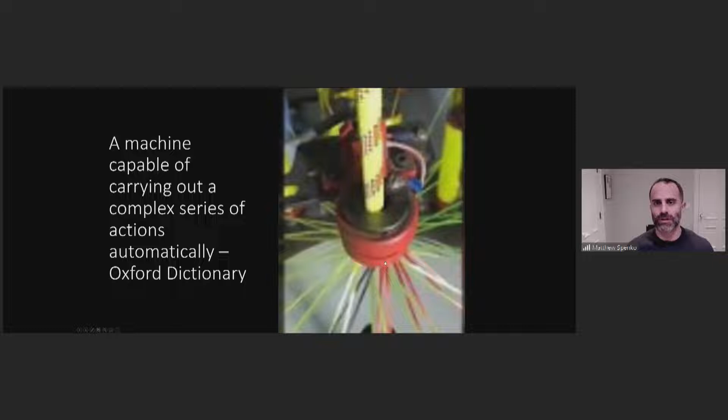So the first question I'm going to ask here is, what is a robot? I'm sure a lot of you know what a robot is. I would guess that most people can't actually articulate it. It's hard when you ask somebody to define a word, that's really hard to do. There may be some people out there who don't know what a robot is, or have a feeling for what it is but aren't really sure. So I'm going to look at a couple different definitions of robots.

The first one I found online, from the Oxford Dictionary, is: a machine capable of carrying out a complex series of actions automatically.

So I'm going to play a little video right here and we'll see what we can do. I would argue that this is a machine carrying out a complex series of actions. We've got all this, it's creating a rope, right? It's binding all this rope together, and we can watch that again.

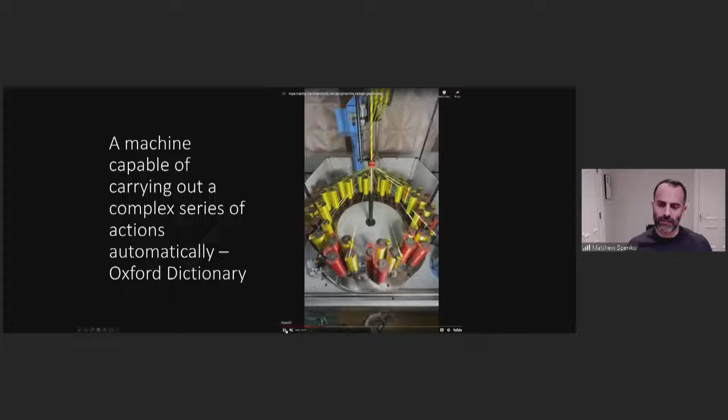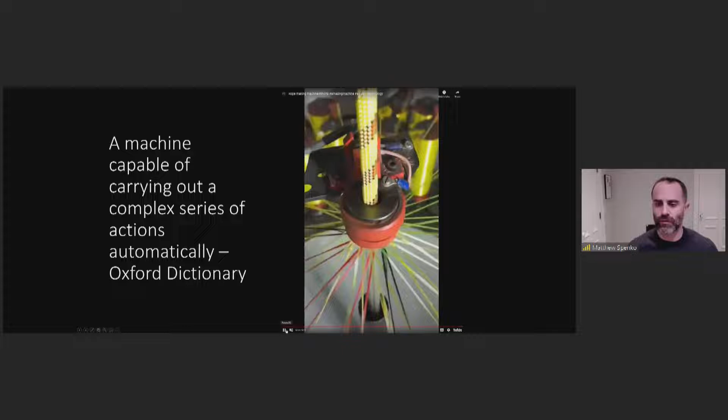Sometimes when I ask people and get some feedback, how many people think this is a robot? A lot of people raise their hands, they think this is a robot. I'm going to disagree, I don't think this is actually a robot. I think this is doing something over and over again. It's automatic, it is doing a complex series of tasks, but there's something about that just says, hey, that's not really a robot to me.

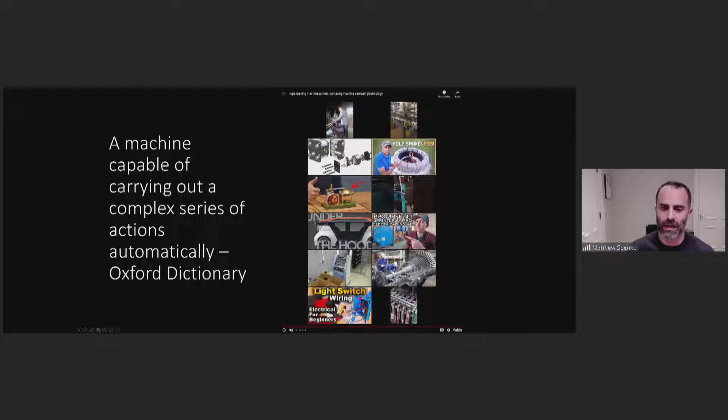This is another example right here. This is a definition, again, from the internet: a machine that operates automatically with human-like skill. So I always start off with what human-like skill is.

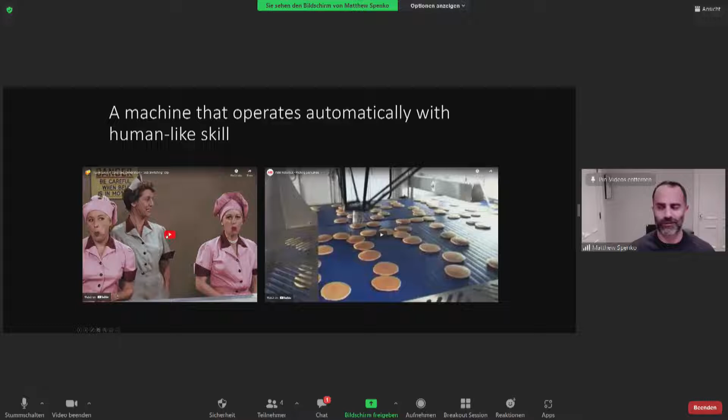This first clip here is from I Love Lucy, a famous TV show from the 1950s in America. This is one of the famous scenes where Lucy and her friend Ethel are working in a chocolate factory. We won't watch the whole thing, it's actually very, very funny, but we'll just watch a little part of it right now.

Looks like my sound isn't coming through, but that's okay. Basically, the instructor's telling her, hey, it's time, we're gonna work on this chocolate factory. So Lucy and Ethel are moving along, and they're wrapping up the chocolates in the chocolate factory. As you can imagine, in any sitcom, it's not going to go quite well for them. Things are going to speed up. I'm gonna speed it up a little bit here.

I'll skip ahead as they're moving along here. And of course, all of a sudden, they can't actually keep up, right? This is a very common robotic operation, this is a pick and place operation. There's a lot of robots out there who do these types of operations.

All right, so obviously, they're not going to make it, and they end up going too far, right? Okay.

Now I'm going to show you another video here from a modern robot. This is called a parallel link manipulator, and these are designed for pick and place operations. We'll show it here.

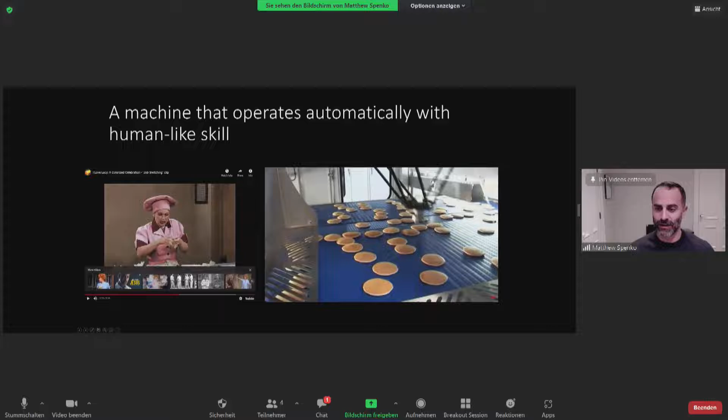So this is a robot doing the same thing. It's picking up pancakes in this case. Nothing like delicious industrial made pancakes. You might feel different next time you go to the store and buy some pancakes, knowing that this is how it's done. But look at how fast this thing is moving.

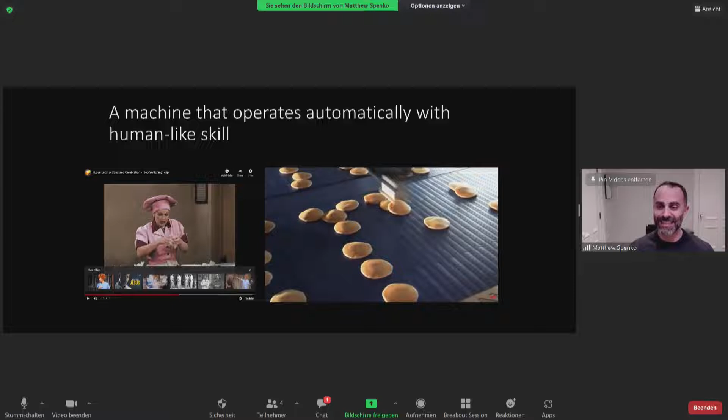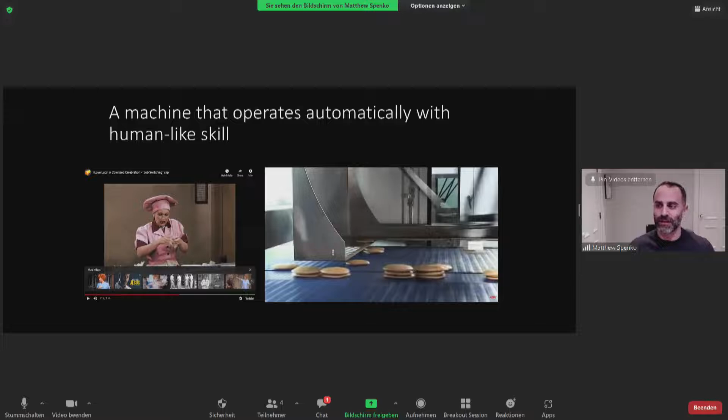And this isn't even top speed for these types of machines. These machines can actually move much, much faster. It doesn't need to, obviously, in this case. But I'm arguing here that this is a machine that's operating with something that far surpasses human-like skill. It's much, much better than human-like skill. So I don't like this definition either, all right?

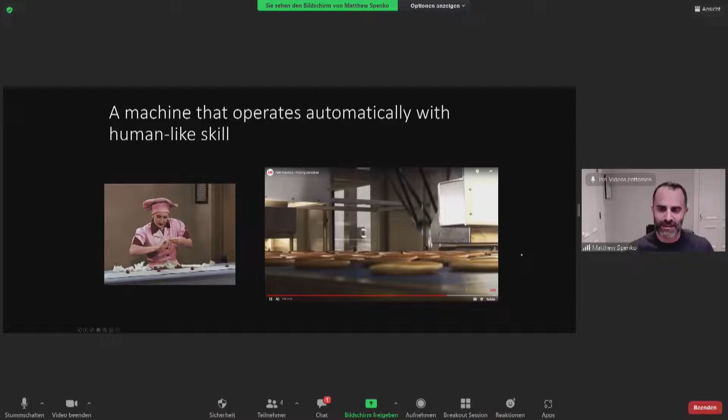All right, so next definition we have, here we go. This is from dictionary.com, and this is a machine that resembles a human and does mechanical routine tasks on command. So I'm going to show you this video from Boston Dynamics. Probably I'm going to guess there's a large number of you who have seen some videos from Boston Dynamics. Boston Dynamics is a company that is definitely at the forefront of mobile robots, and they have been for many, many years, for decades.

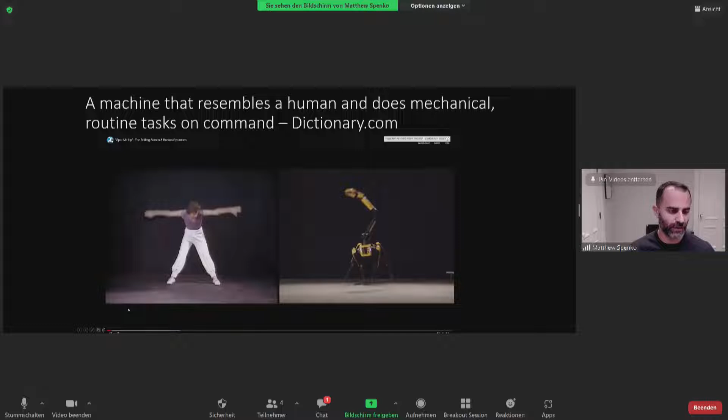And they specialize in legged robots, so they're a lot of fun to watch. Again here, the sound doesn't seem to be coming through, but we'll see. If it does, you can see Mick Jagger on the left and the Rolling Stones. And you've got one of their quadruped, that's a four-legged robot on the right, that is dancing along with Mick and the rest of the Stones here.

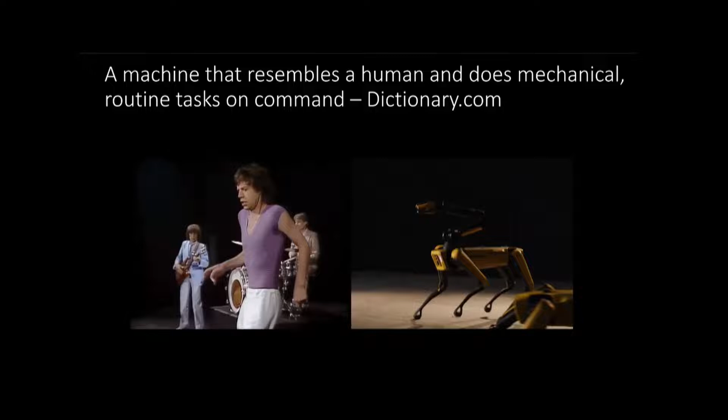I'm going to argue here that that is definitely a robot, and it's definitely not doing any sort of routine task on command. It is executing a series of complex behaviors. It's interacting with its environment, and it is responding to feedback in the environment.

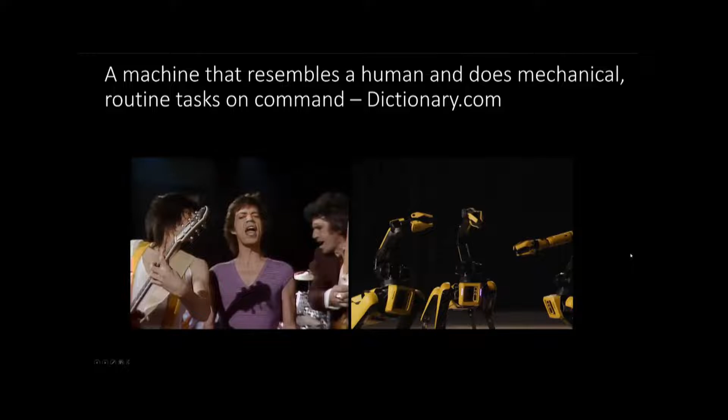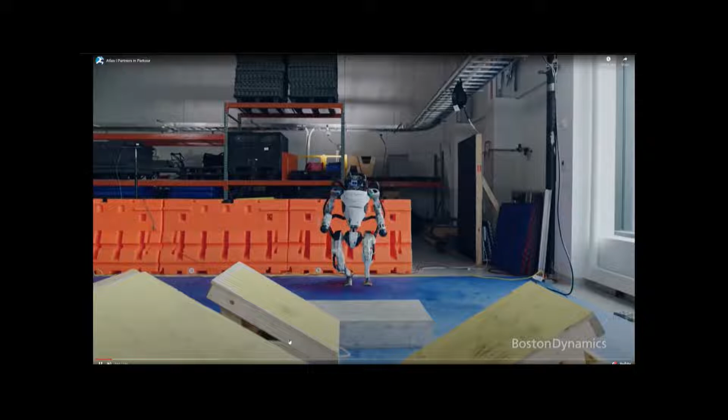So my definition of a robot is... I forgot, I got to throw this one more in because I'm going to show this a little bit later. Plus it's just really, really cool, and it's the state of the art. So we'll show this, this is Atlas robot. This is a bipedal robot, so this is one that resembles a human.

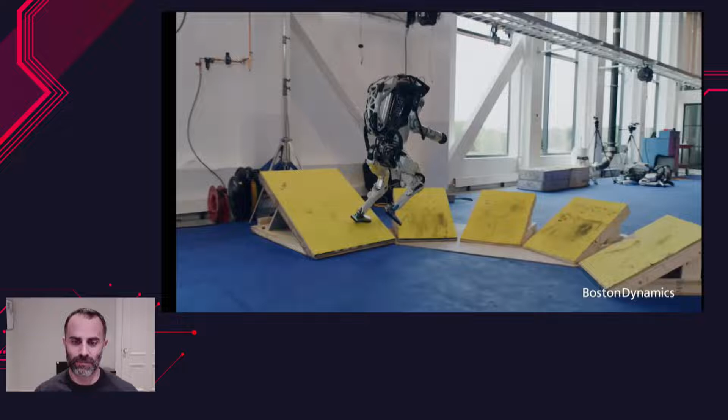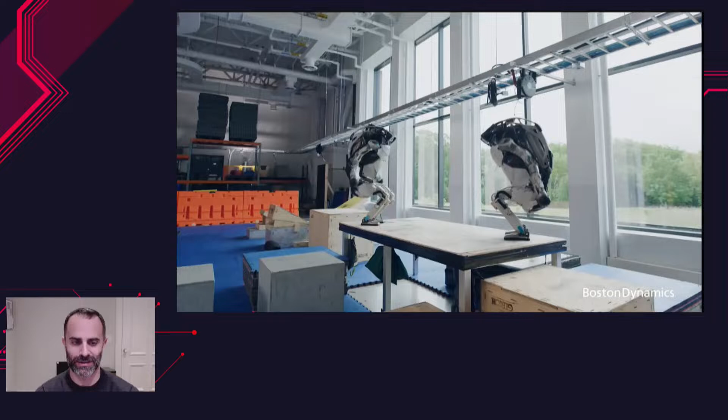You know, I've been doing this for 25 years now, and the fact that this stuff is coming out is just really, really impressive.

All right, so what is a robot? So I say a robot is a machine, because I think it does have to be a machine. It can't be a simulation or a computer program. Some people think those are robots. I don't. I think that it actually is a physical machine that moves and interacts with its environment. So it's not just like an HVAC system that runs your air conditioning and heating in a house, because that's a machine, but it doesn't move, and that's not a robot.

So it's got to move, it's got to interact with its environment such that the machine changes its behavior based upon sensory feedback. So it's got to have some idea of sensing its environment, and then changing what it does based on it.

Now those can be two different types of sensors. We have what are referred to as external sensors, probably what you think about: vision sensors, LiDARs, radars, sonars, all those types of things, and contact sensors that go out and physically interact with the environment, whether that's photons coming in or touching the environment.

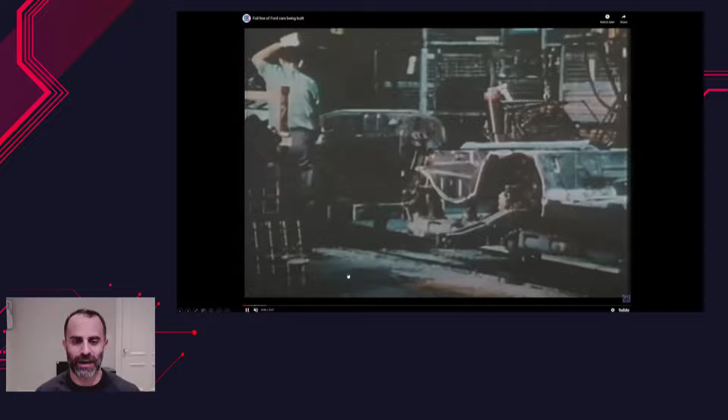Here's another video I have from the 1960s, I think. This is a factory, a Ford factory from the 1960s. I love this video, so take a look at just how many people are in this factory.

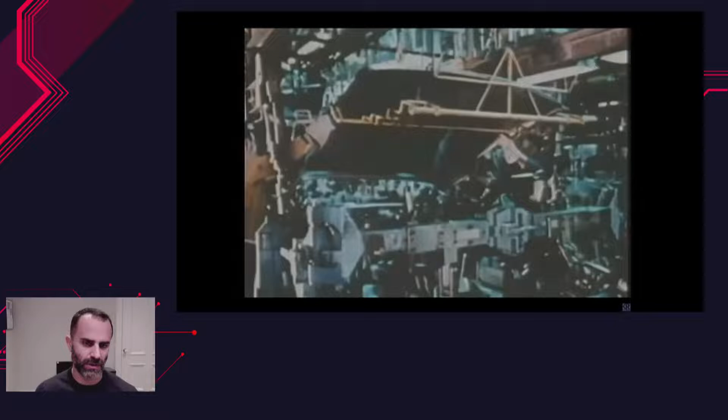We've got people moving large pieces, we've got people spot welding. These are spot welding operations, all done by humans. More spot welding, we'll see some deburring coming up soon. They're moving everything in, so much welding.

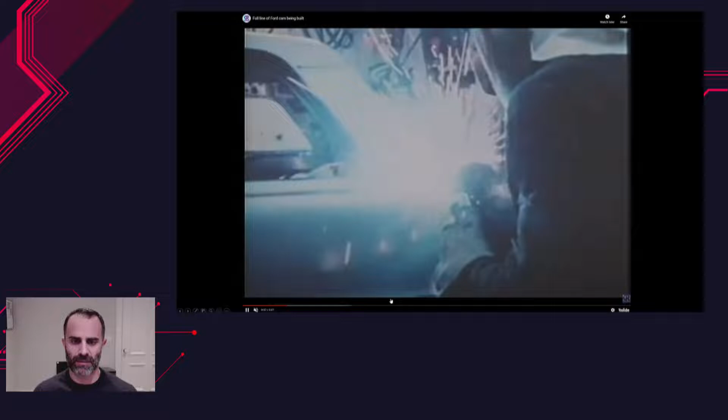Here's some soldering and brazing operations happening, more welding operations. All right, so really just a lot of stuff. Now there's another guy painting. Again, all done by humans.

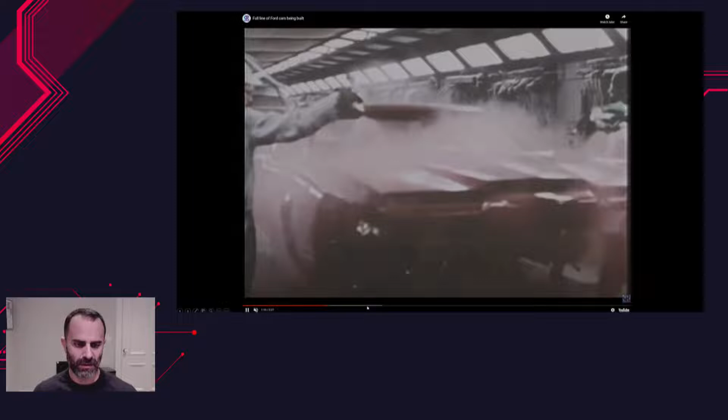One other thing, let's see if it's coming up - there's an inspector coming up and moving it on. Just to give you an idea, this was 50, maybe 60 years ago. I'm not sure if this was in the 60s or 70s, but this was pretty much the operations through the 80s. And now I want to show you what happens now.

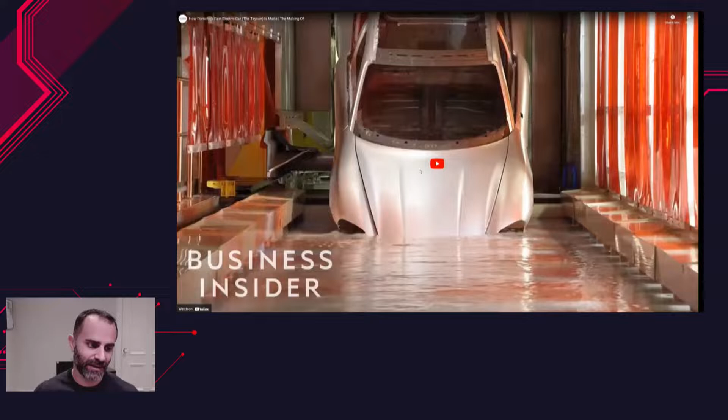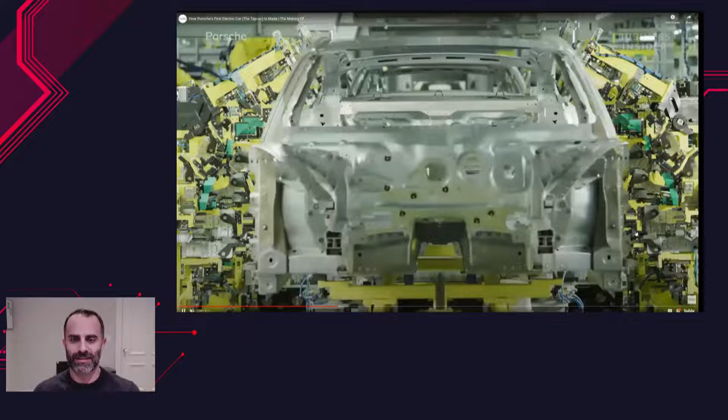This is a Porsche Taycan factory. I could have shown you the Teslas, but I like the Porsches. So we're going to watch the Porsches move through this operation. There are still humans around, but not so many.

These guys are doing a lot of finishing operations. Let me get to some of the basics. Here you have these huge manipulator arms. All the spot welding that we saw before is all done by robots now.

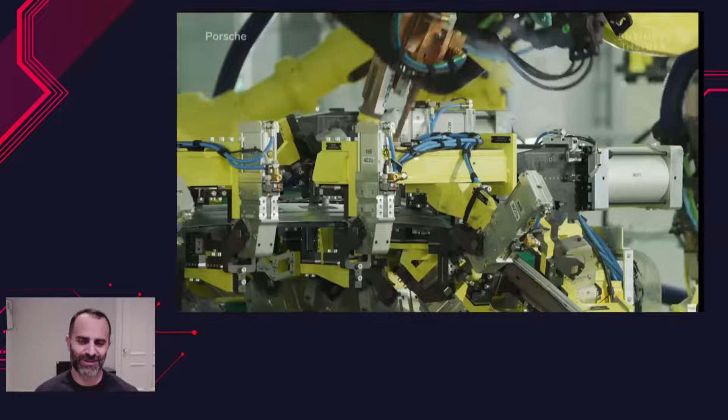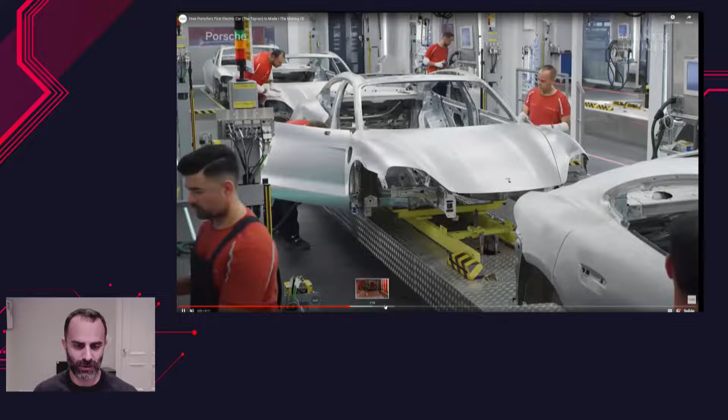There's really very little human interaction until you get to the general assembly stuff. This is starting to assemble things, doing some of the more intricate things that the robots can't do. It really speaks to just how much robots have permeated manufacturing, obviously high-end manufacturing like cars, but also other general manufacturing.

All right, so that's one example here. The other example I have is of Amazon warehouses, and these things are amazing.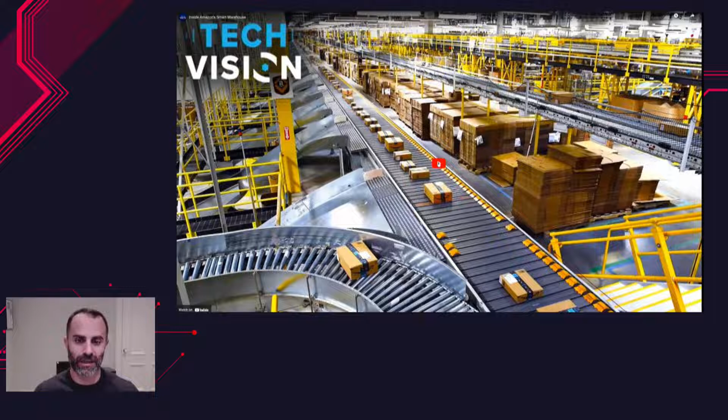I don't know if anybody has worked in a warehouse. I used to work in a warehouse when I was in high school, and it's not the best job. Maybe you work in one too, I didn't enjoy it so much. It's one of the reasons I went into engineering. But let's take a look at what Amazon does, which is very different from how I worked in a warehouse - I used to go around and take stuff off of stacks.

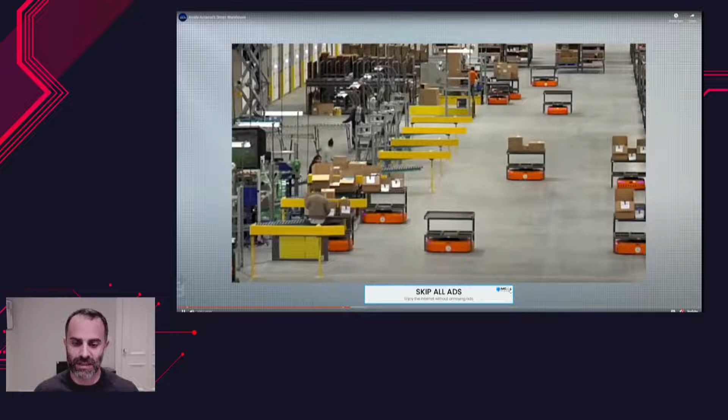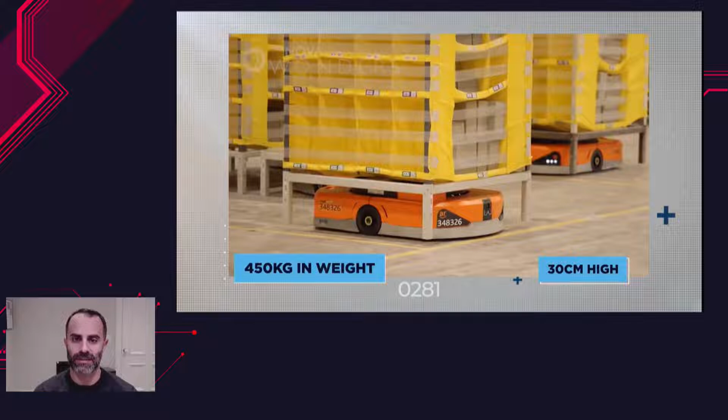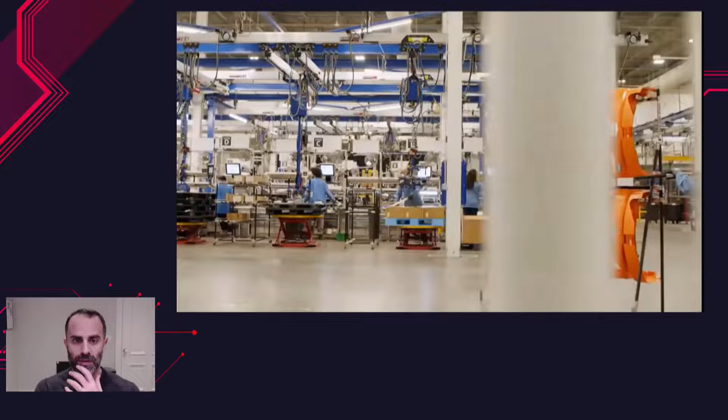So what we have here is the Kiva system. These are robots, and they're moving stacks, moving products to humans who are literally standing in place. So they're able to jam so much more into a facility. They have these giant facilities and can pack them so much more because they have these robots that are programmed, and all the humans do is put products into the stacks to go into the warehouse, or take products off the stacks.

Let's see what some of the humans are doing - we'll watch these guys doing some operations later on. So here are the humans going through the stacks. Here's an operation, here's a stack, they see them, and they're pulling these off the stacks, doing these sort of last minute operations.

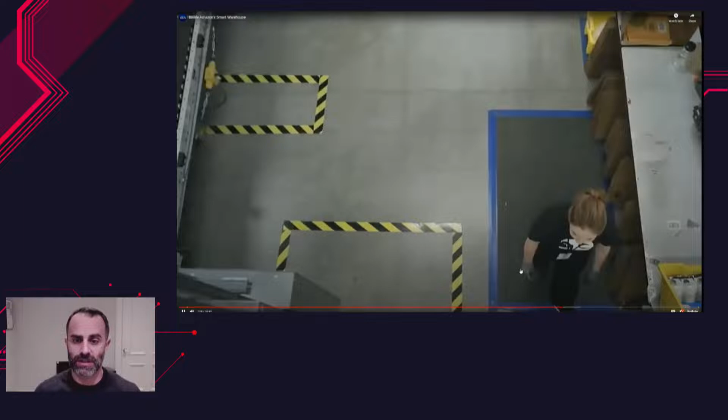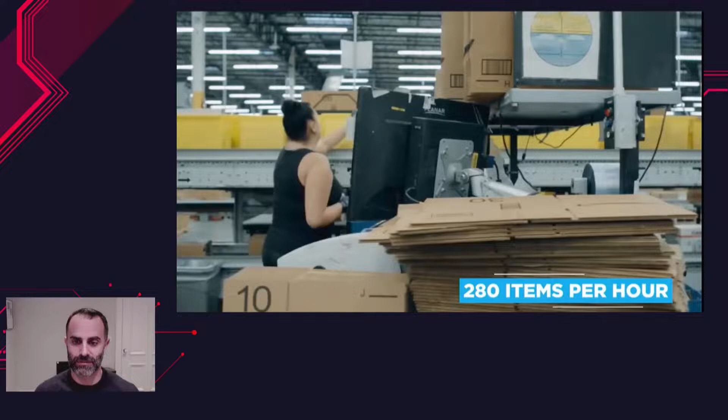Now, if you ask Amazon - and I had one chance to talk to the CTO of Amazon a long time ago - whether Amazon is trying to remove jobs, they will not say that. They will say every place Amazon goes, they increase the number of jobs, and that's probably true. Here's a good example - a person standing in one place just pulling stuff off the stack.

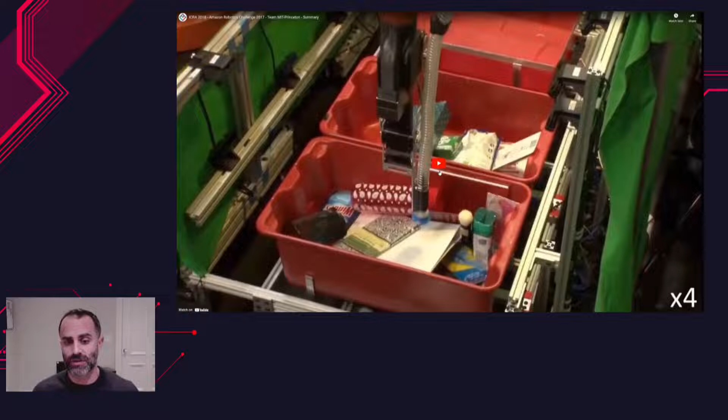Amazon also sponsors what's termed the Amazon Robotics Challenge. A lot of universities were part of this challenge for maybe 4 or 5 years or so, and their task is to create robots that pick stuff off shelves, basically doing one of the few jobs that Amazon is hiring for today.

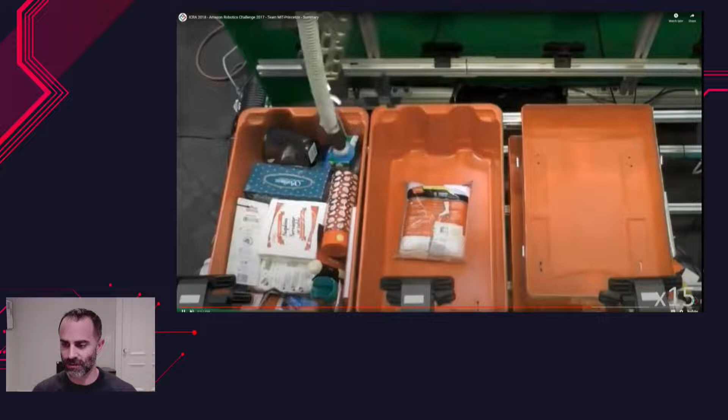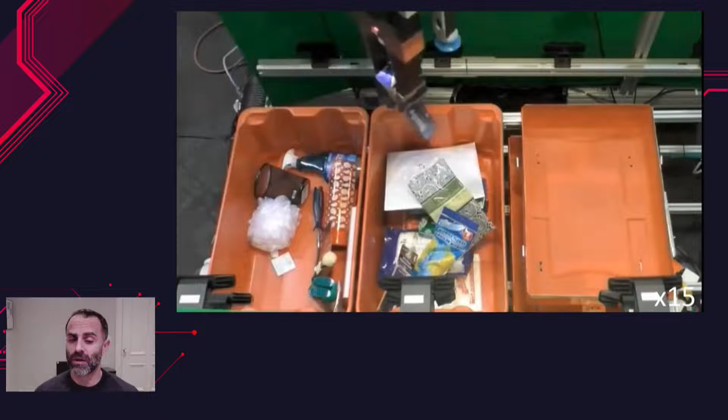Now you can see they're not that great. Every time you see a robotics video, look down and see the times 15 - this means it's operating at 15 times its actual speed. So yeah, it's doing the job, but I think the best these robots got were around 120 picks per hour, where human operations get up to 500 or 600 picks per hour. So still a far way away, but people are working on that.

These companies are putting a lot of money into these efforts.

All right, so what happens when the robots leave the factory and start coming for me? I'm sure you guys were all very concerned about this. So when the robots get their lasers and start coming after us, what do we need to do?

We have two options. The first option is that we're going to fight, and I'll show you what you need to do. The first hint is that almost all of the videos you see on the web are videos of only the robots doing the job successfully. Here's Atlas doing the same thing it was doing before, but failing every single time. I'm actually really impressed that Boston Dynamics put this video up on the web.

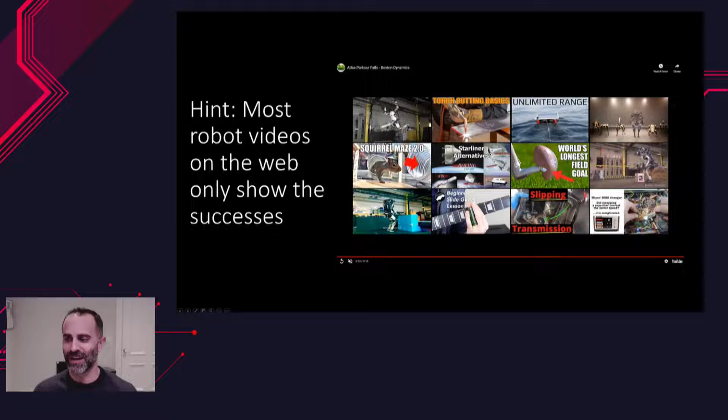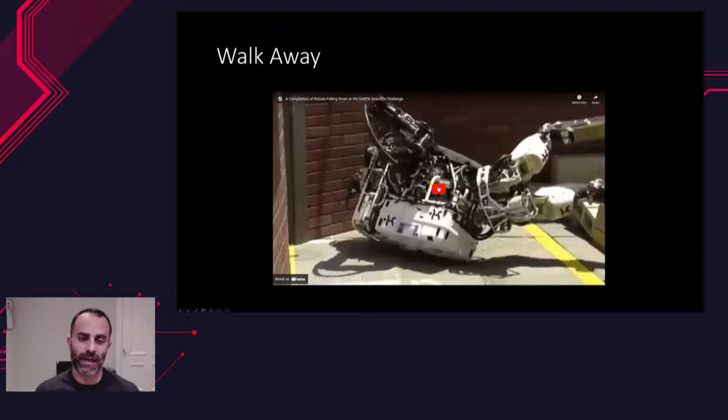These videos come from the DARPA Robotics Challenge, which was about 4 years ago. But still, other than Boston Dynamics, who supplied a number of the robots for this competition, this is pretty close to the state of the art of what's out there. So if you do want to fight, one of the first options you have is to simply walk away, because simply walking is extremely difficult for a lot of these robots.

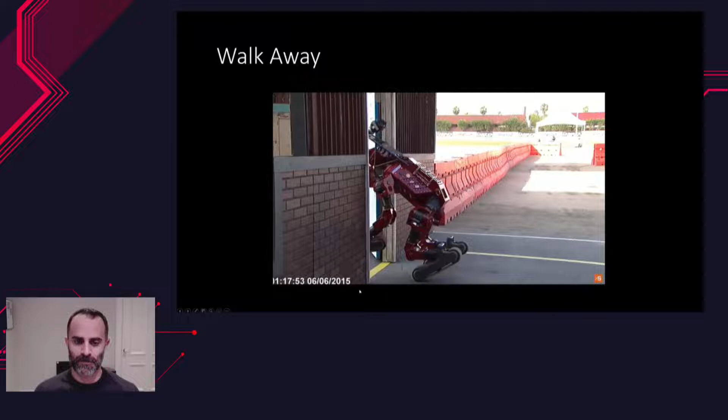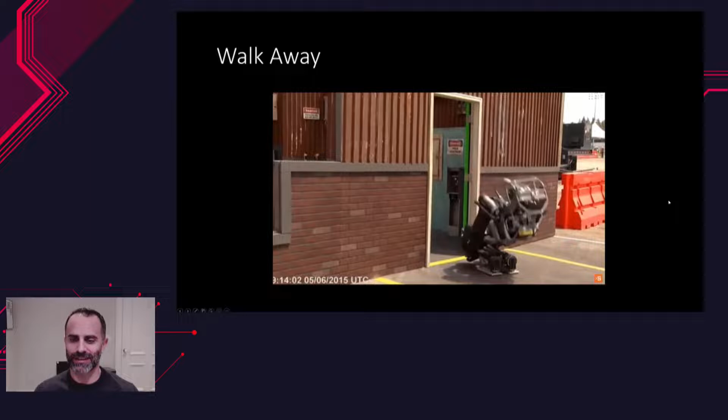Here's one trying to get over some rough terrain. You saw one in the beginning try to get over - here's someone trying to get over the sand, not doing the greatest job at it. All right, so that's option number one, you can walk away.

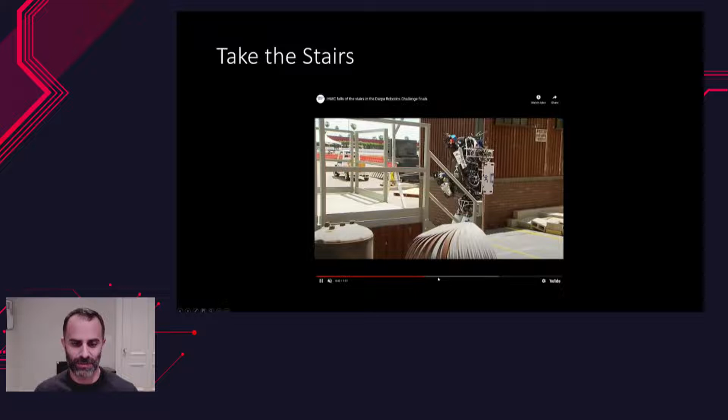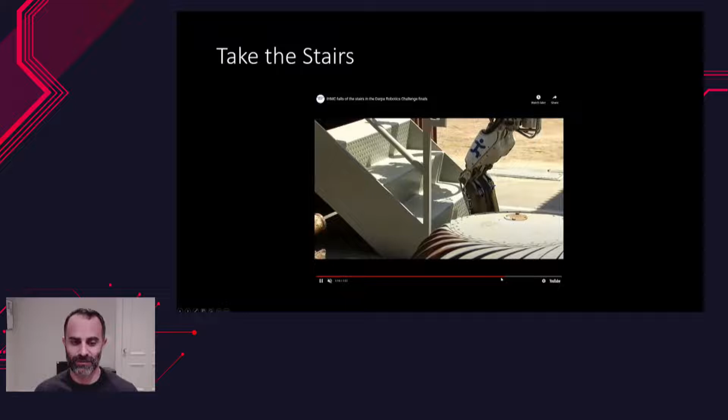Step number two you can take for fighting back is taking the stairs. This guy is trying to make it up the stairs - it took him, I think, 8 minutes, basically stood in this one position for 8 minutes. I'm going to have to skip ahead a lot here - it's slowly making its way. Hopefully by this time you're already on the 3rd or 4th floor of the building, and it's getting up there. I gotta skip ahead some more - it's gonna finally take its first step soon.

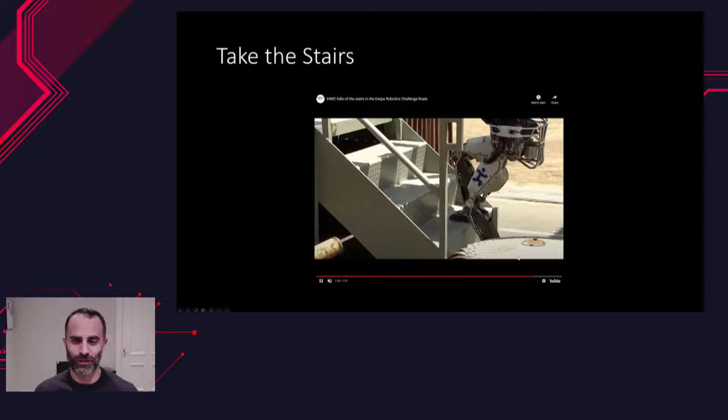And... wait for it... and no, not quite. Didn't quite do it. All right, so you can take the stairs.

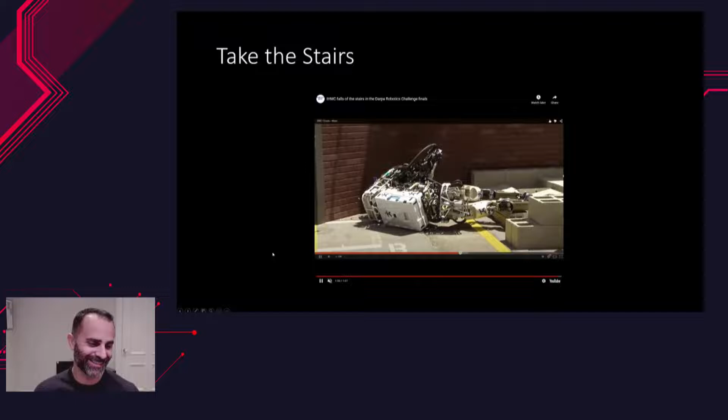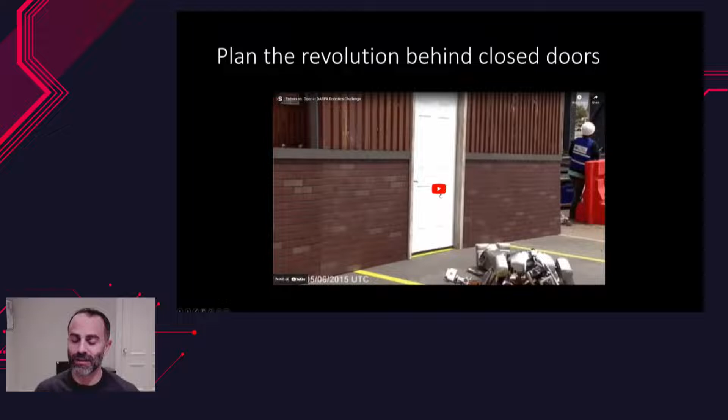Third option, all you have to do is plan the revolution behind closed doors. I don't know if you ever saw the original Terminator from 1983 or 84, and all the revolutionaries were behind the door - knock knock, the Terminator comes to the door. Well, in reality he comes in and wreaks havoc, but in reality these robots have a really, really difficult time just making it through a door.

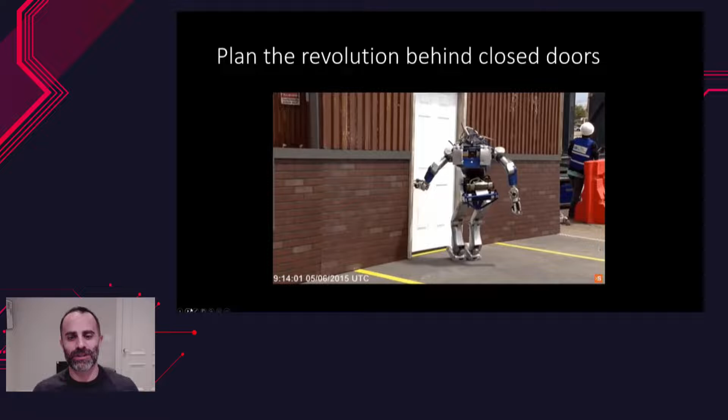I think that one's my favorite - it gives up with flair, it fails with some flair. This guy kind of just quits on you over here. All right, so that's pretty close - again, that's about 4 or 5 years old now, but it's pretty close to the state of the art. The other popular thing to do with robots, especially these legged robots, is to...

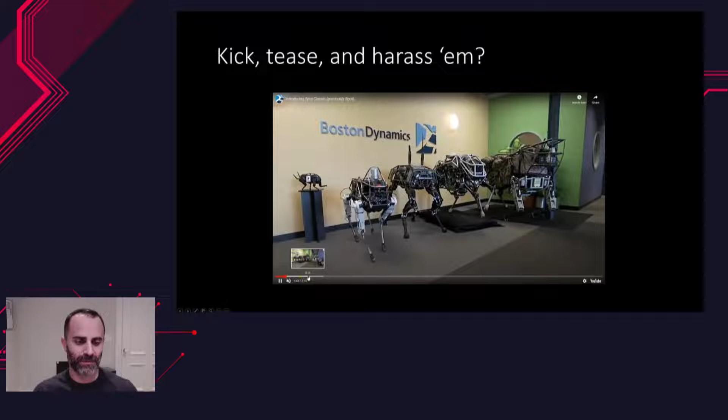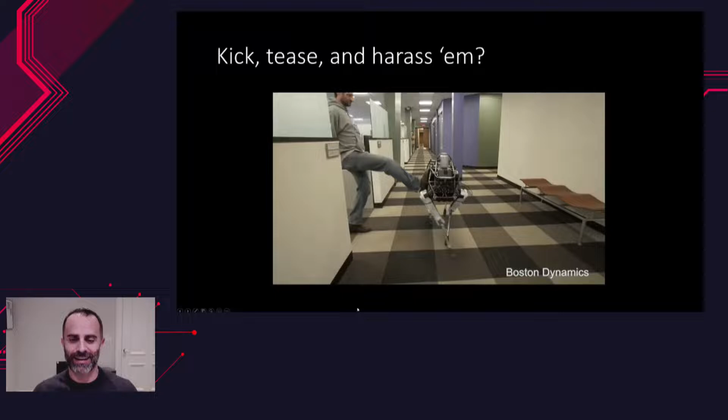...harass them. So here we have systems that we're going to start kicking. It's a very popular thing to do because it really shows off how well these things balance. There you go, it's a nice big kick.

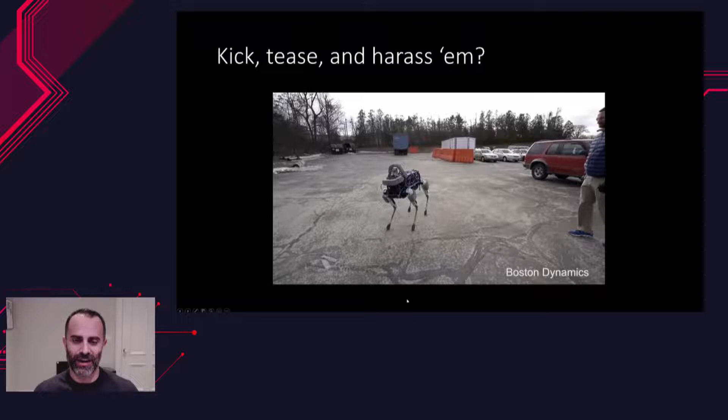I think there's some worry that once robots become sentient, they're going to watch all these old YouTube videos and see how badly we harass them. So maybe we don't want to do that too much too often.

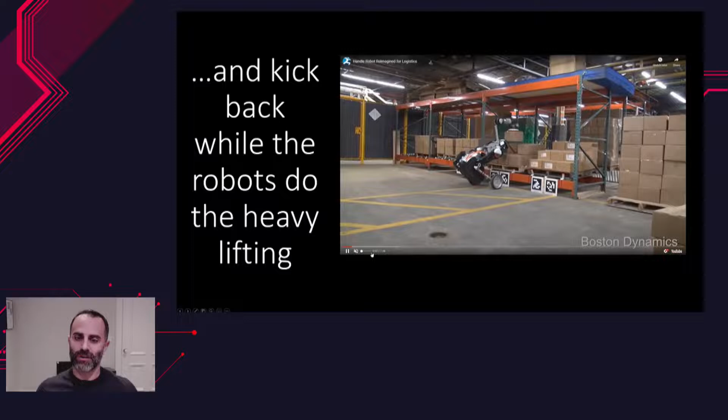So we can fight it as much as we want, or we can realize that these robots are going to be out in the warehouses, perhaps in our homes, doing a lot of the heavy lifting for us. Hopefully you guys have some options on what to do when the robots start coming for you. I've got a few minutes left, about 6 minutes.

I want to cap it off with some of the things that I do in my lab. We have a research lab, mostly PhD students, a couple master's students, and a number of undergraduates who volunteer or even get funded throughout the year working in the lab. We've done a lot of different things.

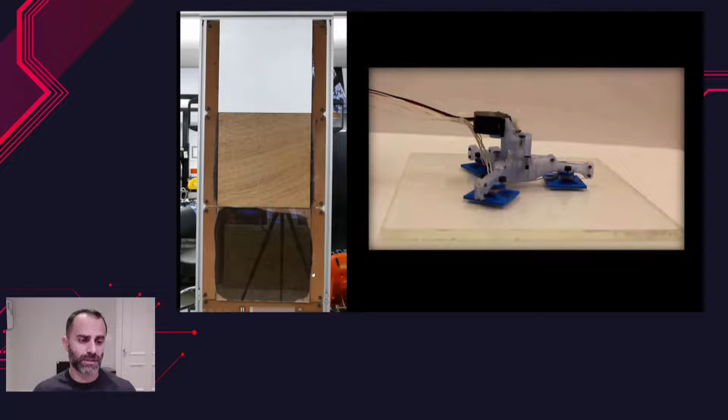These are some examples of climbing robots. The one on the left we did in collaboration with NASA's Jet Propulsion Laboratory. This one uses gecko-like adhesives and electrostatic adhesives to climb up walls on different surfaces - glass, wood, and drywall. You can see that guy climbing up there.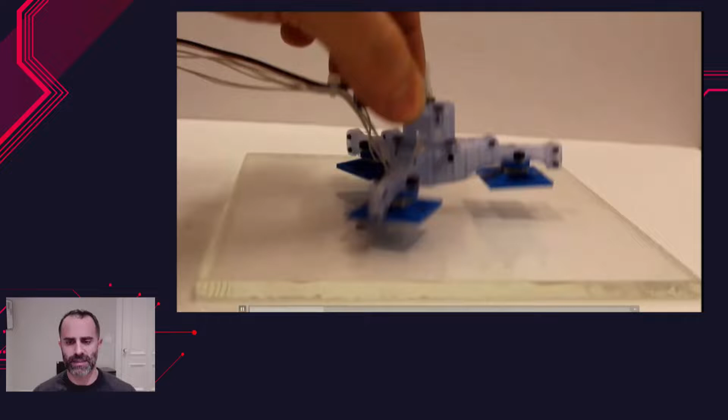The other one we'll see here - this is the same thing, a gripper made of gecko-like adhesive. You can see here he's pressing down the gripper, and it's not adhesive, but then for a split second - it may not come through in the video - he engages the pads of the gecko gripper, and they're actually squeezed outward.

What's really cool about this adhesive is that it's controllable. We can turn the adhesive on and off. It's not adhesive there, we apply a shear load to it, and all of a sudden we have adhesive in the normal direction - orthogonal to this glass plate right here.

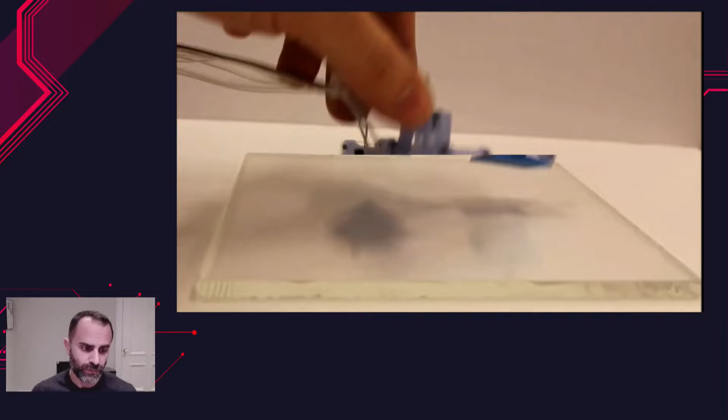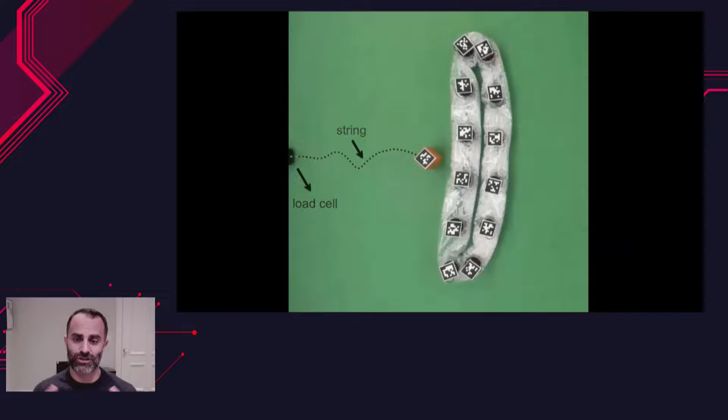And then we have one of our latest robots, and we'll show a number of videos from this. This is a soft robot, based upon what we term a boundary constrained granular swarm - which I'm sure you guys are thinking, what the heck is all that?

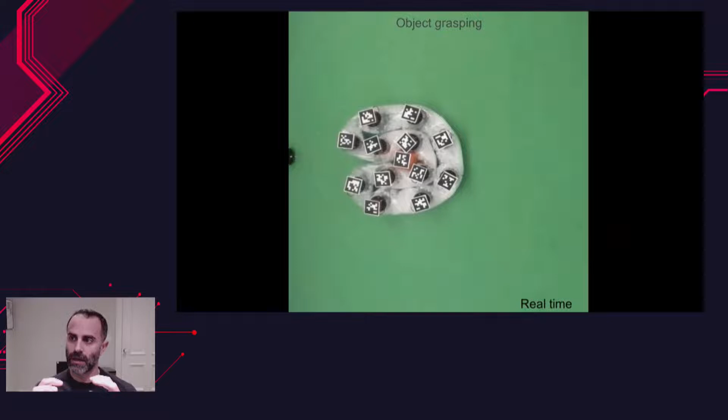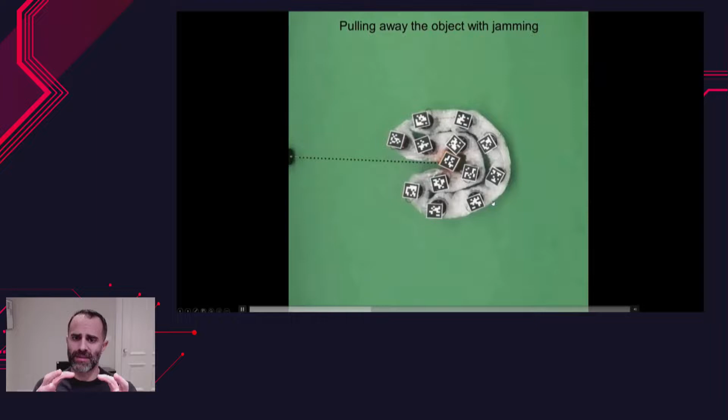The best way to describe it is if you think of a bag of coffee grounds that you can buy in a store. If it's vacuum packed, those coffee grounds are rigid - the whole thing feels like a brick. But if you release that vacuum, it allows the coffee grounds to flow like a fluid. That's what we've done here. We basically said, what happens if we take that bag and put a whole bunch of mobile robots on it? We move it around - what can we do?

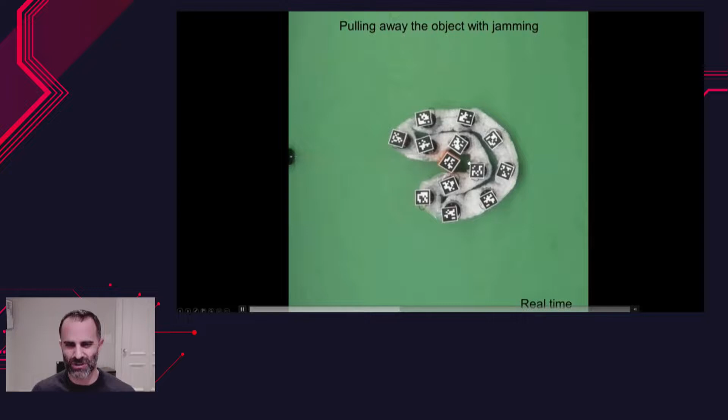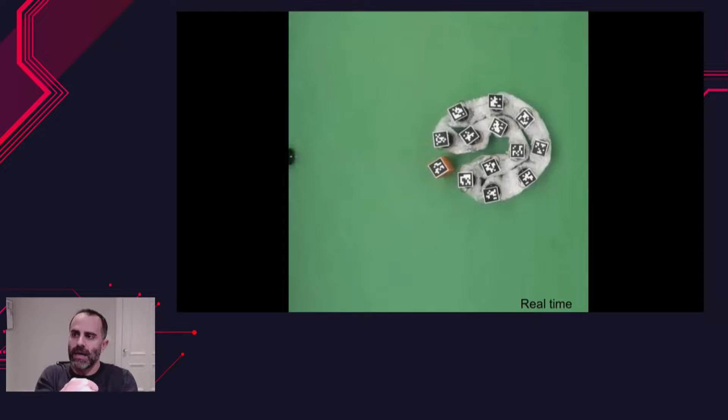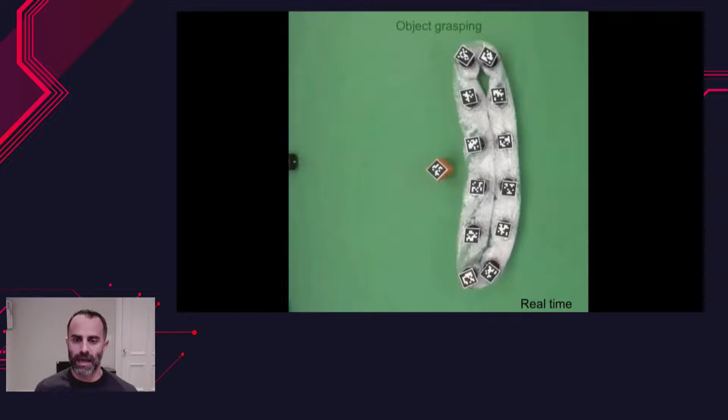What we can do is something like this, where we're pulling. You can sort of see here in the middle that square shape - we grabbed this object and then created a vacuum. We sucked it in, and then we're pulling ourselves out after grabbing onto this object. This allows us to create a really compliant object, a really compliant robot - essentially a soft robot that can grab stuff and interact with the environment in a forceful way.

This is the same thing - I'll skip ahead a little bit here - where we're pulling on this object, but without creating that vacuum seal. So here we're not going to be able to pull with as much force. We can do a lot of other cool stuff with this robot here.

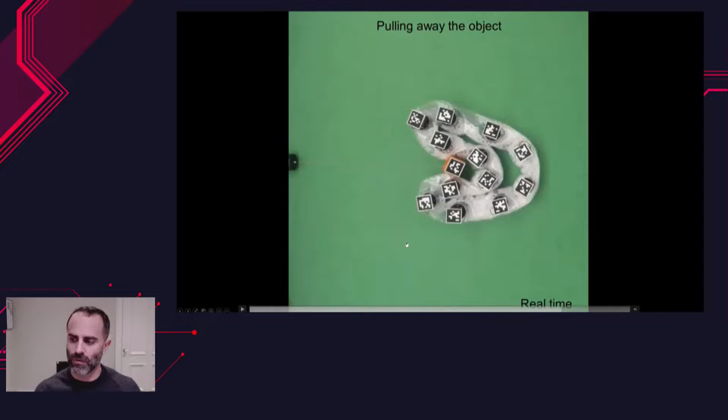Let's see the next video. I think I have a couple more minutes. And so here's where we're going to be grasping and moving around some objects.

Let's move it ahead. He's kind of moving forward here, and we can track this object. Right now this is being done with an external tracker. We've got a camera on top, not just for the video, but also to help us identify where all these parts of the robot are.

We're working on it right now to essentially remove that camera, so this system could do everything by itself with only sensors on the body of the robot. He's going to go around, grasp this object, and move it through.

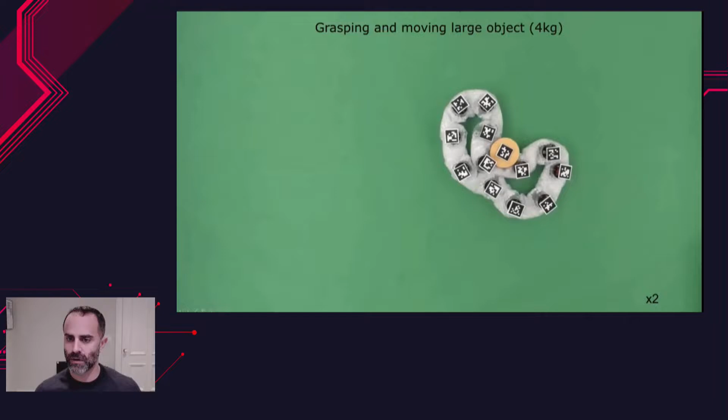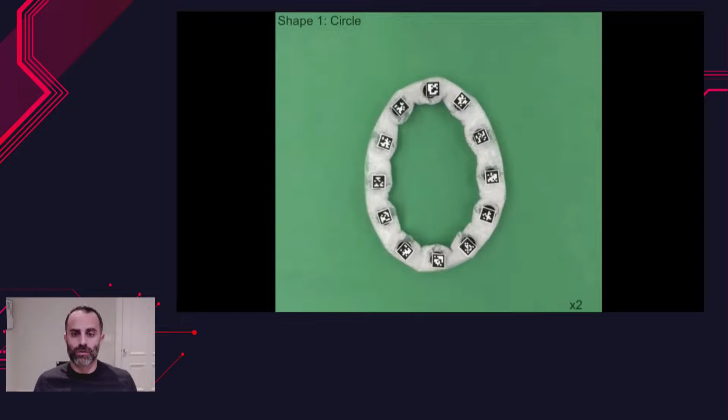I'll show you one more video here. This is a shape formation, just to show you how we can take this soft robot and move it to different shapes. We can create circles, triangles, C shapes, and this is sort of a little line right here. You really have this conformable robot moving around like that.

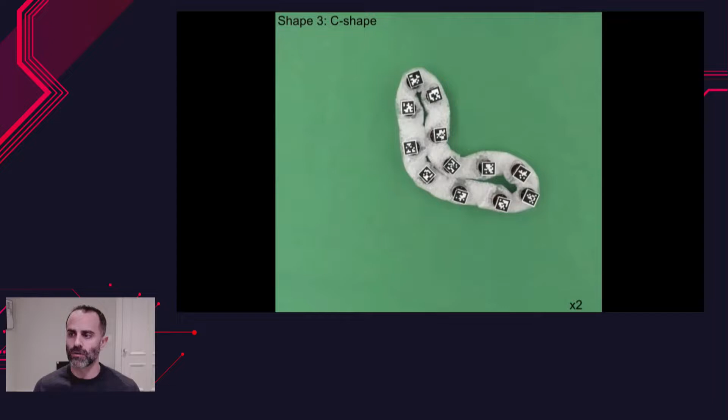I think I'm out of time here. We do other stuff in our lab, but this is some of the latest stuff and the stuff that I'm really excited about. If I have time for questions, I guess I'll take it.

If not, I understand. Good luck to everybody in this organization. I know there's some competitions there involved, and I hope you enjoy it. I hope you look to doing robotics or similar STEM type subjects in the future.

Dear Dr. Spenko, thank you very much, it was so interesting to listen to you. Klaus, what do you think about this? I thought it was amazing. I know this title for the lecture just caught my attention instantly.

I'm from 1974. I grew up with Terminator movies, and of course my first thought was, I have to listen to this, because I've been fearing the Terminators would come and take over us when I was a kid. Working with robotics, I can see the development, and it's phenomenal, it's exponential. So my question to you, Dr. Spenko, is how can we avoid a Terminator scenario coming around? We need to teach ethics in coding and robotics, don't we?

Yes. First of all, I hope everybody takes this as tongue-in-cheek. I really don't think we're going to come into a Terminator or Matrix-like situation. But yes, ethics not only in coding, ethics in all engineering and science is extremely important. Any institution these young students go to will be teaching them about that and how to practice it.